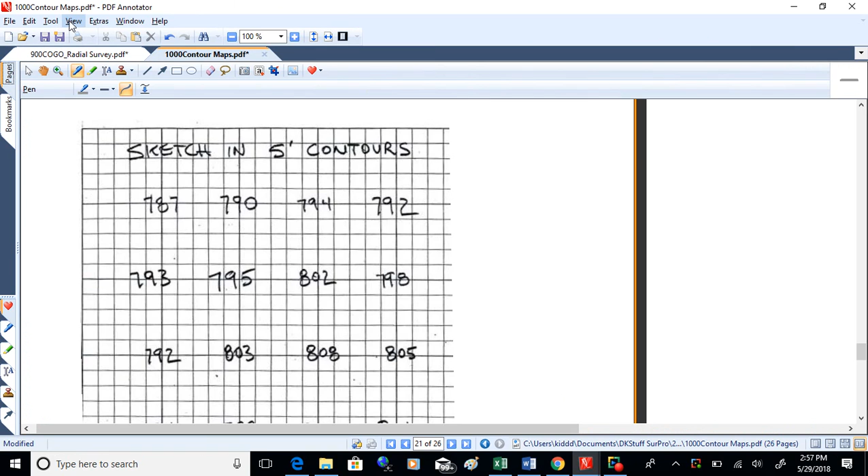So why don't you take this map here, on page 1038. Sketch in 5-foot contours, start with the 800 footer. Mark the points that are at 800 feet and then connect them together. That's what I mean by that.

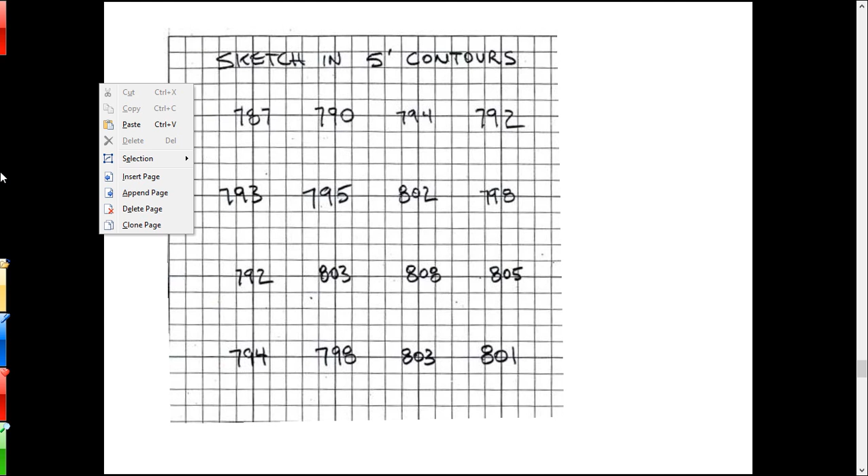So what you're looking for is a given line that has a point above and a point below 800. For instance, this line right here has a point above and below 800, going from 802 down to 794. That's 8 feet, so you're quite a bit closer to the 802. So I'd estimate 800 being about there.

Do that for the other points you can find and connect the dots and see if you can get a contour map made out of that. Normally what I do with these is I start with a point in the middle of the elevations, upper middle, and then the other contours, once I've got the one line, tend to be kind of parallel to the one I've drawn before.

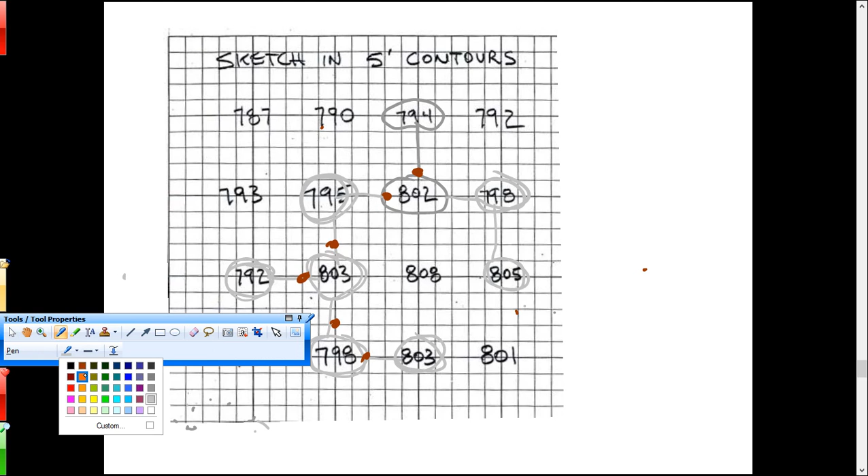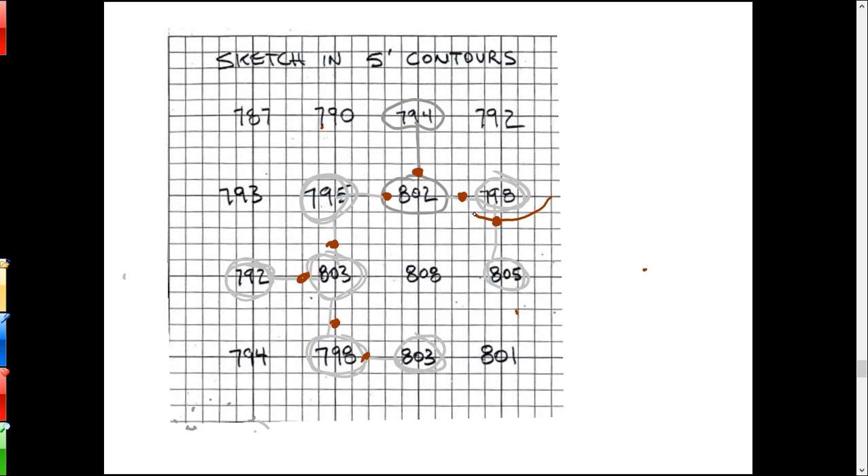Something like that for 800, roughly. You all doing all right with that? It may not be exactly that because we're just sketching. Notice the use of the word — I'm not saying interpolate, I said sketch. All right with that? Any questions?

Now we're doing 5-footers on this. Once you've got the one line, you can start to put in the others. The first one's the hardest, but the others won't be exactly parallel to it, of course, but they'll be kind of parallel usually, that's how it goes. So for 795, you could look at that and just kind of keep going and get the thing drawn up.

I spent a day or two out on a site, we were just turning angle and shooting distance. There were hills and little valleys all over the place, and we got all the data, turned it into the drafter, and the drafter did this and came up with a good map of it. That was the start of doing the project, to have a good contour map of the site.

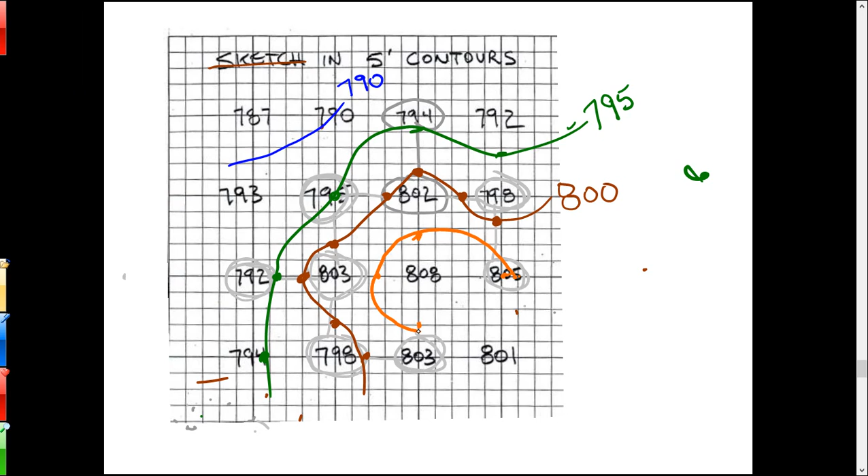Yeah, that's kind of what I was after. You'll notice when you do 805, the other ones go off the map somewhere, right? You don't know where they go. But 805, that's all on the site, okay, so 805 doesn't run off the map. That's kind of why I wanted you to draw that, just to see the difference there. So 805 would be something like that, I think. Okay, so we got a little peak in there.

So that's basically how you create these. Any questions on that bit?

So let's have a look at doing a contour map of a survey then. This will be your homework, or part of it anyway. It starts on 1051, and what you've got there is the data from the survey. You've got the sketch from the survey on 1052 to help you make the map, and then you've got some graph paper on 1053 to put the map.

Now, the first thing you want to do here is take that data and center the map, okay? Make sure the map will fit on your graph paper. So we got a scale of 1 inch to 50 feet, 2-foot contour interval. You can eyeball in your contour lines.

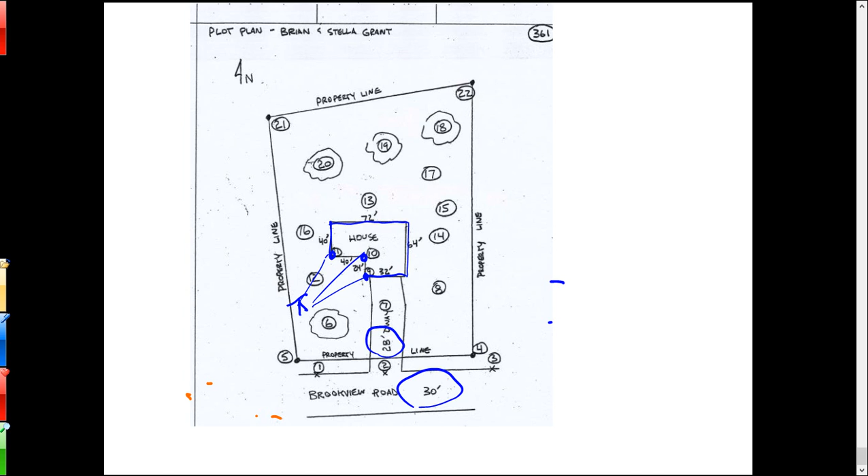Okay, so we've got the trees in there, lot corners, driveway, points on the road, and the house points plus the dimensions. Now notice that you got the widths of the driveway, 28, and the road, 30. So you can offset your points on the driveway 14 feet either side to get the driveway. So that's 14, that'll be 14. Then the road, you'll offset a full 30 that way, okay.

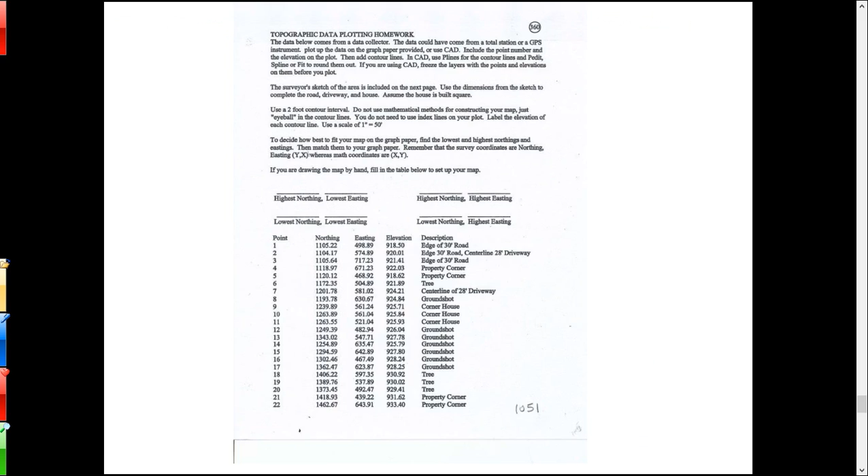All right, so that's what we've got. So let's kind of get a start on this. First, let's get this thing centered on the map, on the graph paper, I mean. So you've got these 22 points. What's the highest northing you've got, roughly?

1462 there, that's pretty much it, isn't it, down at the bottom? Okay, so I'd put that in here. How about the lowest northing? What do we got? 1104, yeah, it looks to be 1104. Okay, so that gets you the range for north to south.

So the furthest south point at the bottom of the page has got to be at least, if you're on even 50 feet, it'd be 1100, maybe even 1050. Then count your way up and be sure you get to at least 1500. That way the map will fit. You with me there? Okay.

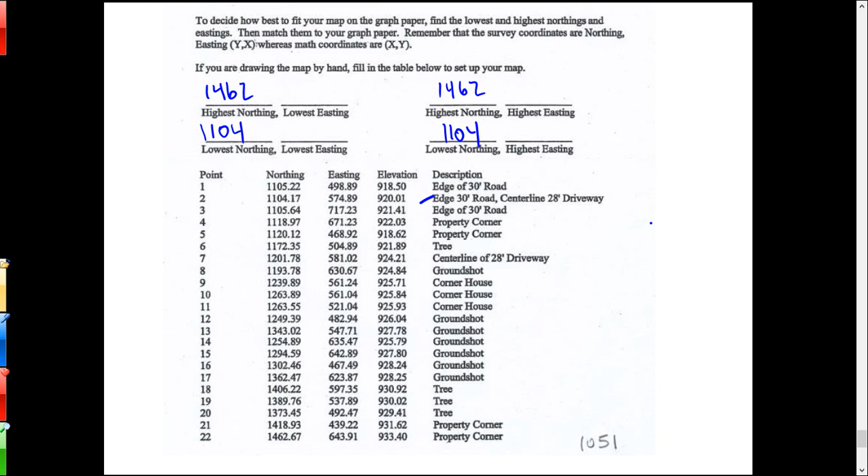And then how about the eastings, lowest easting, is that 442? 439, okay, so there we go. So these are like the corners, so to speak. And then highest easting, what do we got? 772? Or, oh really, where's 717? 717, okay, thanks, okay.

All right, so just be sure, that's kind of the range of your map. So north-south, it starts down at least 1104, which should be 1100 on an even 50-foot grid, but maybe even 1050 to get you a little space so you're not putting stuff right on the edge of the map, especially because you got to offset 30 on that point. I mean, that 1104, what is that? That's the edge of the road, yeah. So you need 30 feet more than that because you're going to offset that one down 30 feet right there. So I think you want to be starting at 1050, so you got enough room to put that, okay?

So when you set up your paper then, probably start down at 1050 and then just start working your way up. Each main grid is 50 feet. And just be sure before you start drawing everything up that this is going to work, that you got enough room. And I'm a little bit out of scale on how I'm drawing this, but you want to get at least to 1500. And I think you got enough for that because I think you got 10 big grid spaces here. So 1050, 1100, 1150, 1200, 1250, 1300, 1350, 1400. I'm up to 1450 roughly.

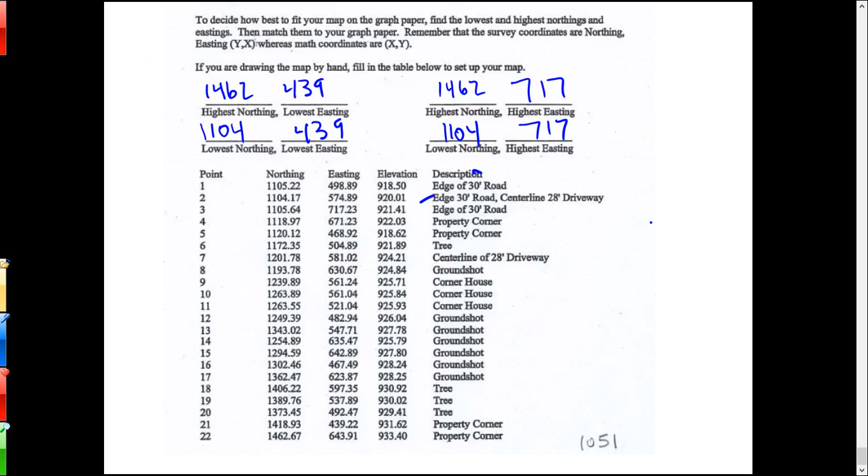Let's try this one here. So 1100, 1150, 1200, 1250, 1300, 1350, 1400, 1450, 1500. Yeah, I think you got enough room there. Yeah, you can get it centered so it'll fit. You just want to think ahead so you don't run out of space to put your map on. Same thing east to west. You're going to start at 400 and end at 750. And those boxes go on 50-foot intervals.

Okay, so what if you have a house that's just like a square, like a warehouse or a barn? You can't get 3 points. I guess you could set it that far enough. If it's square, if you can get 2, you can get away with 2, if you had to. But generally, the general convention is to get 3. I guess you could just go straight out to a corner and get 3 points. Yeah, you could. You ought to be able to get them.

What if it's a circular house? Yeah, right. What if it's a hexagon? What if it's Windsor Castle? What do you do then?

Okay, so get that grid set up, then plot up your points. I would just plot up all the points first, but put next to them what they are. So like point 1 is a road, RD. Remember to switch the easting and the northing, because we're used to doing X, Y, but these are Y, X. Remember to switch those. Plot them up, and put next to them the point number, what they are, and their elevation. Put that in kind of light.

Then get out a straight edge and connect the lot lines. Get that house in there. Get the road line, offset the road 30 roughly. Offset the driveway either side. Get the house in there.

And then, since you've got those elevations in there, now you can start to interpolate in the contours. If it's easier, you can do it on AutoCAD if you like - again, just remember to switch those X's and Y's. Maybe it's not easier though, maybe it's easier to just do it by hand. Whatever works, it's fine.

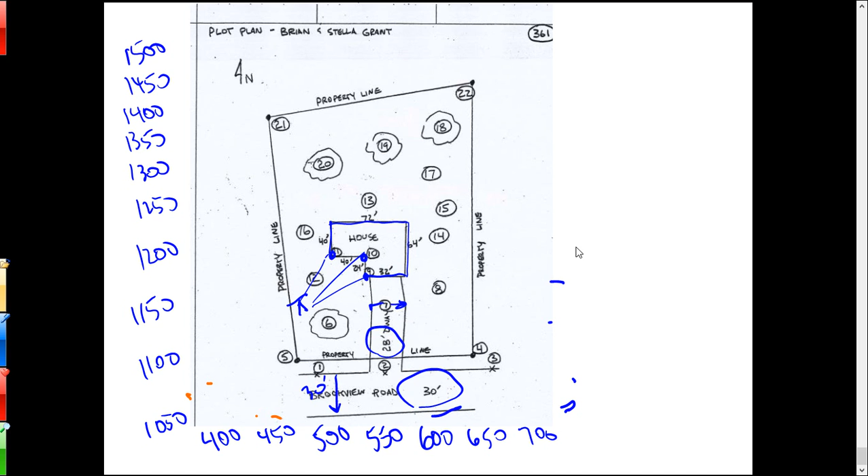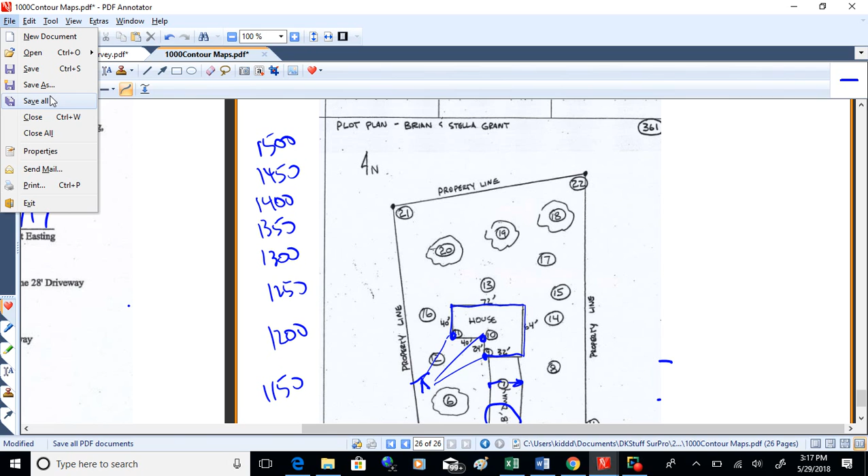That's pretty similar to what you're doing with your ramp project, with the one addition of contour lines. So not only are you plotting up the points, you're also putting in contours on this one. The contours would be kind of funny on that ramp project - any sort of those straight kind of lines get kind of funny with contours, they look a little goofy. So there's no reason to, we won't do contours on our ramp project. With the walls and the ramp and all, it'd be kind of hard to do and make it look like something.

Now let's look at this. What we did out there for the last thing was trig leveling, okay? So let's have a look at that. This is a ways back in your book. These are vertical angles.

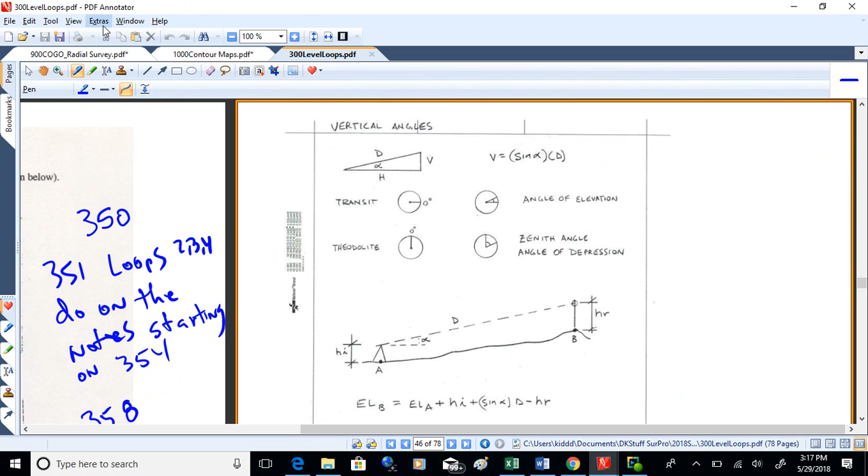This is kind of back towards the beginning of your book. The homework's on 359, and the explanation's on 341. So 341 is where we're at.

Vertical angles were part of what we were doing out there on Thursday. So what's going on with a vertical angle is you use it to find elevation differences. Now, if you want to get something just flat on a point, use a level - that's generally what I've been told, and I stick with that. So if I'm grade staking a real flat pipe like a sewer here in the valley, I'm going to use a level, I'm not going to mess with a total station. But I have heard of people using total stations for this, and you can do pretty darn well with it. But if it really matters, I'd probably use a level on projects.

But you can do good leveling with a total station too, and you do it using trigonometry. So if you've got this vertical angle here and a slope distance, you can use trigonometry and find that vertical offset distance there, okay?

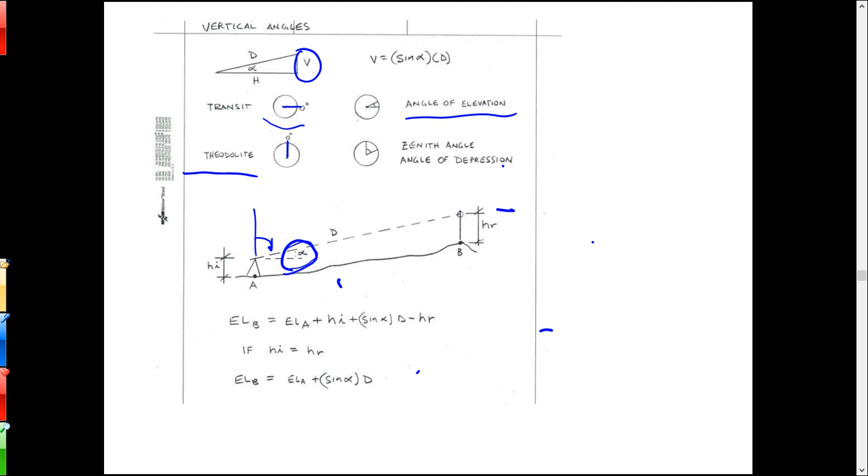So just understand, some of you were asking what that angle was, the V angle on your instrument - that's the vertical angle, that's this one right here. So if you're shooting a flat line with a theodolite, that V is going to read 90 or 270, one or the other, because you're measuring straight up as 0.

Now, if you're going to do this trig leveling, we kind of went over this for the lab. You start with the elevation of the point that you're set up on. You add in your lowercase hi, that gets you up to the telescope.

Then you add in this vertical offset, sine alpha times distance, which your instrument in the lab did for you automatically. So we're starting on the ground, coming up by the hi to get to the telescope, then adding sine of that vertical angle times the slope distance. That gets you up to the glass on the prism. Then you subtract off the height of the rod, and that gets you back down to B.

So that's the basic formula for finding an elevation on the ground using trig leveling.

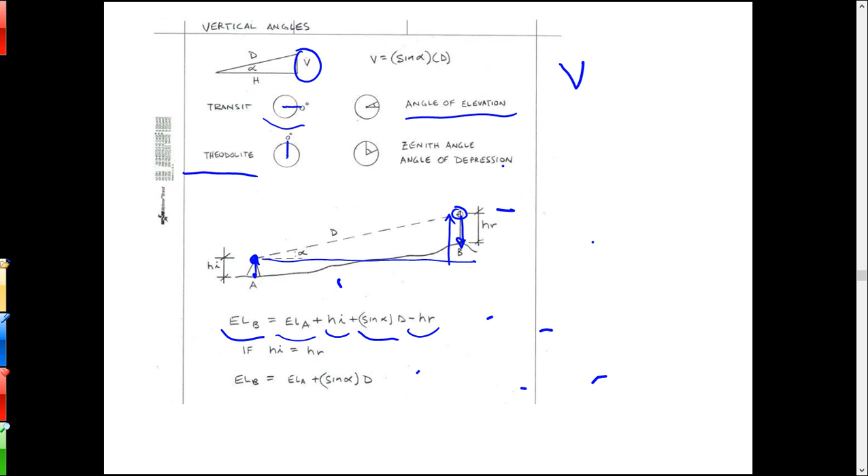You have to use a total station or a transit. You can't do it with a level because levels just shoot flat. You need something that'll turn you an angle. If you could get the level to angle up and shoot the distance, you could do a trig. There are other instruments you could use, but you have to know the angle. There's things called Abney levels and clinometers that foresters use. There are other ways to work this out, but you've got to measure that vertical angle somehow, and the distance too.

So why don't you find this one here? What's the elevation of B for that one? Now remember, you want this angle right here if we're going to use that formula. So the elevation of point B is the elevation of A plus the lowercase hi plus sine alpha times the slope distance, minus the height of the rod. That's the formula, on page 356, 359.

And remember, you're going to need to convert your angle into decimal too. I gave you that angle in DMS, so you'll need to use decimal for that.

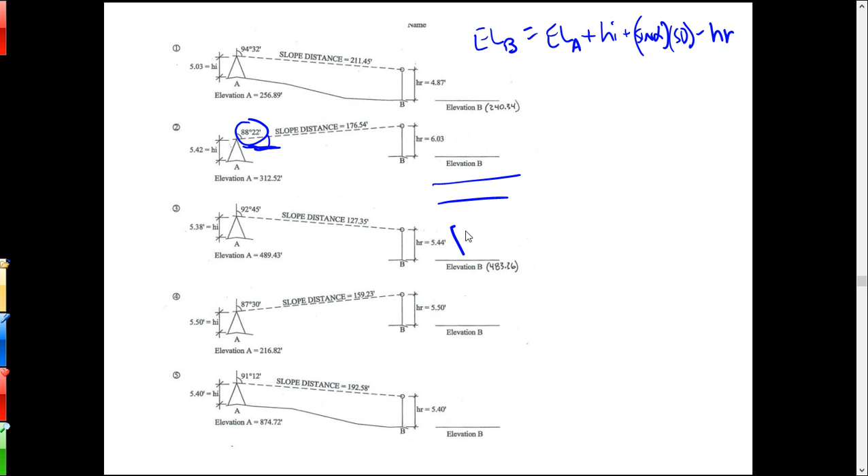I want that angle in there. So I got my straight 90 minus that given angle to get that. I can't take 88.22 away from 90, so I turn 90 into 89 degrees plus 60 minutes. That way I can take away the 88.22 and get 138. But I want a decimal, so 1 plus 38 over 60 gets me 1.6. Carry at least 4 places past the decimal point there. You want as much accuracy out as you can get. It doesn't hurt to get a lot of accuracy out of that.

That's what you want. Take sine of that times the slope distance, and I get 503. And then it's just a matter of following the formula from there.

So the elevation of B is the starting elevation, 312.52. Add the little hi to get up to the telescope. You're going up 5.42 feet more. From there, that's the sine of the angle times the slope distance. Then you're on the glass, on the prism, and you're coming down 603 to get down to elevation of B. And that's 316.94.

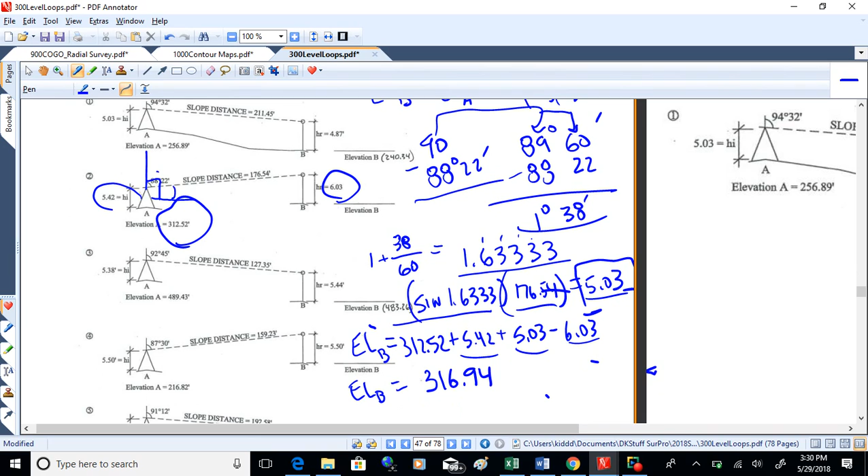So that's the process there. So we doing all right with that? Any questions on that bit?

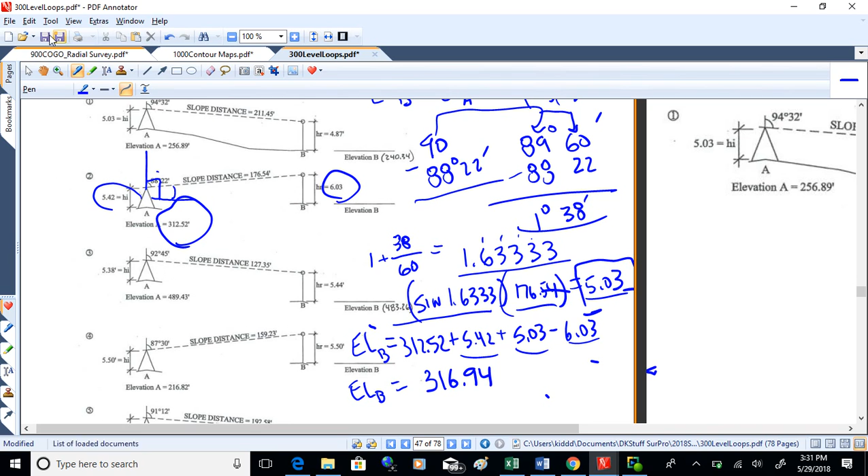Now this one here, what angle are you going to use for right there when you do this one? So the negative is important because you got to subtract that value this time. You don't add it, you subtract it.

So it's going to be negative 432. And if you want to be real consistent mathematically there, what you're doing is taking 90 minus 94.32, so that's the negative 432. And of course, you want to get that into decimal, dividing the 32 by 60 and all that. But watch your signs on this. If you're shooting downhill, your elevation will decrease.

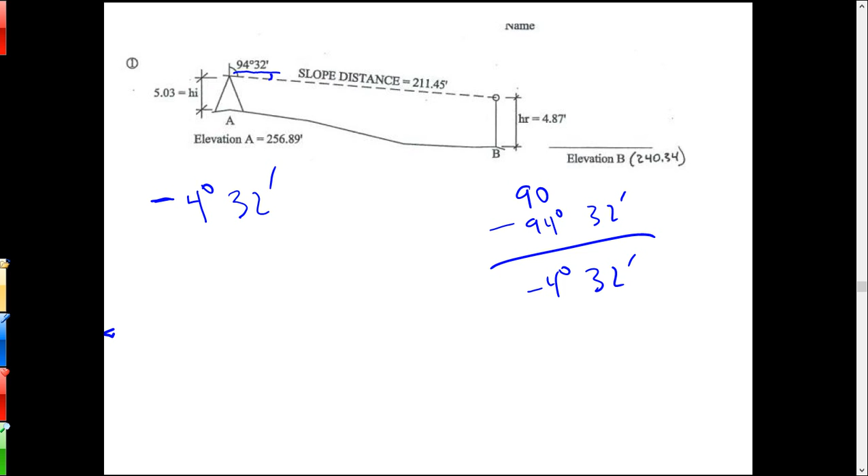All right, so we got any questions on that?